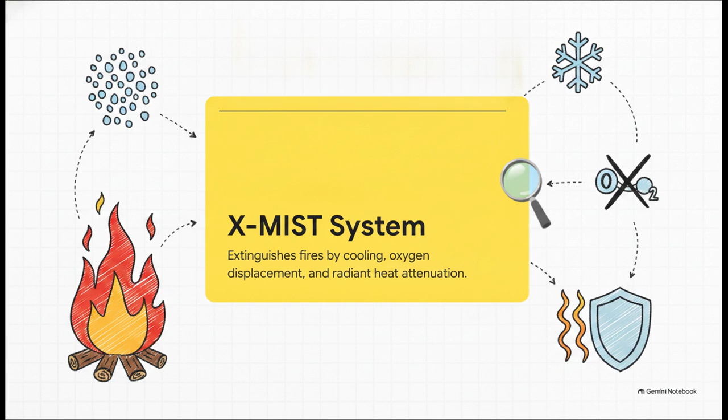So here's our roadmap for today. First, we'll meet the X-Mist system. 2, we'll go over specifications and main components. 3, automatic and manual operation. 4, installation and piping guidelines. And 5, inspection and testing procedures.

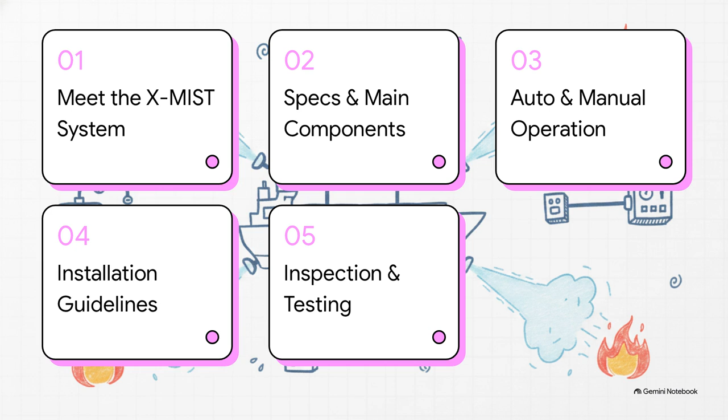All right, Section 1, meet the X-Mist system, certifications and core specs. Let's see what we're working with here. When we're talking about protecting engine rooms, reliability isn't just a corporate buzzword, right? It's a strict legal and operational mandate.

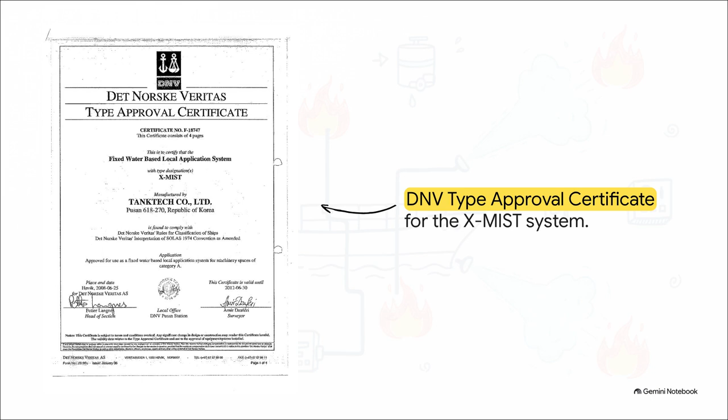This system holds a type approval certificate from Det Norske Veritas, officially approving the X-Mist as a fixed water-based local application system specifically for Category A machinery spaces. What that means for us is that this system has been rigorously tested to withstand the incredibly intense, high-vibration, high-heat environments typical of modern marine vessels, complying strictly with SOLAS regulations.

Moving right along to Section 2. Specifications and main components. The anatomy of X-Mist. Scaling this system for different risks is a precise science. Not every single part of the engine room requires the exact same level of suppression. For instance, the main engine setup is going to demand 13 high-level nozzles pushing 182 liters per minute through a 50 nominal diameter pipe. But compare that to the heavy fuel oil purifiers, which really only need 2 low-level nozzles running at 30 liters per minute.

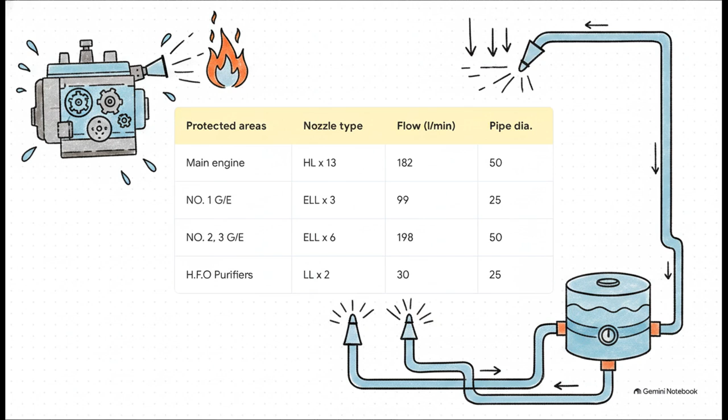The crucial takeaway here is that to supply all of these zones simultaneously with a 20-minute safety buffer built in, the whole system requires a maximum freshwater capacity of roughly 10 cubic meters. Now, pushing that much water at high pressure requires some serious hardware. The scope of supply for the X-Mist system includes a heavy-duty, multi-stage inline pump, and that's driven by a super robust 6.3 kilowatt, 440-volt motor.

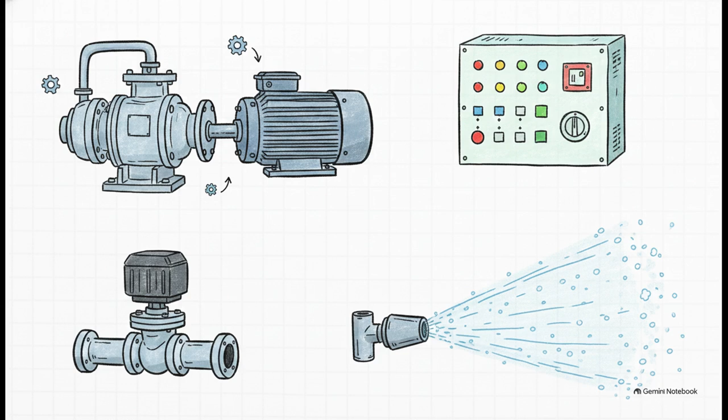It also features a comprehensive main control panel that serves as the absolute brain of the operation, motor operating valves to physically direct the flow, and of course, the highly specialized spray nozzles themselves. Zooming in on those nozzles for a second, these things are meticulously machined from SUS 316 stainless steel to completely prevent corrosion, and they are fitted with these LDPE protective caps at the top. Basically, they shield the delicate nozzle heads from ambient dust and stray paint during normal, everyday ship operations.

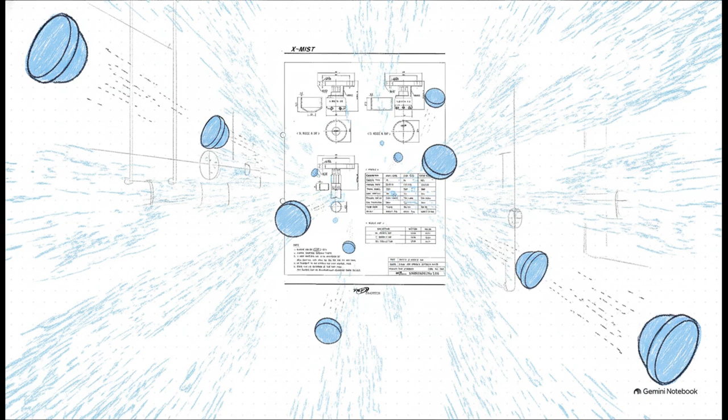But here is the genius part. You don't need to manually run around and remove them during an emergency. The exact moment high-pressure water hits the nozzle, those caps detach automatically, allowing the mist to deploy instantly.

Okay, Section 3, automatic and manual operation, system activation. Let's talk about the automatic sequence, essentially the system's built-in reflexes. A fire must actually be picked up by 2 completely separate detectors to fully activate the system. If just one detector trips, you get a pre-warning alarm. But if that second detector actuates, the system takes over entirely. It sends out a major alarm, commands the main control panel to start up the pump, and automatically opens the specific section valve for that particular zone.

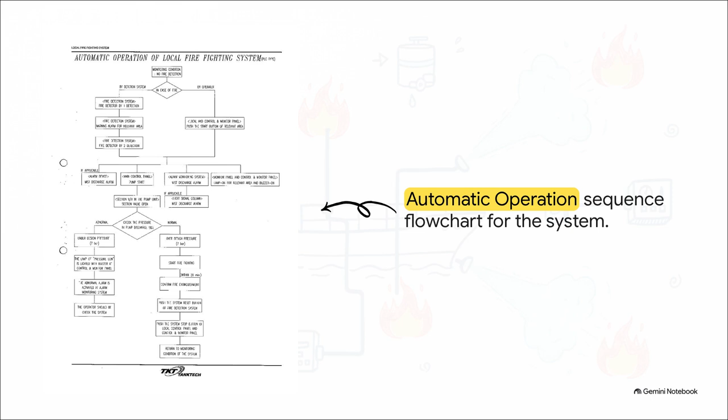Once activated, a highly vital pressure check occurs right on the pump's discharge side. If it's under the design pressure of 7 bar, an abnormal alarm triggers so the operator can jump in and troubleshoot. But if it's over 7 bar, boom, it immediately begins firefighting.

Alternatively, an operator totally does not have to wait for the automatic system to kick in. If a crew member actually spots a fire first, they can manually initiate the whole sequence from a local control panel right near the protected area, or directly from the main control panel in the engine control room. Once that manual start button is pushed, the logic basically mirrors the automatic sequence.

Alarms sound, the pump starts, the section valve opens, and that exact same critical 7-bar pressure check happens before the mist is discharged. It essentially puts total control into the hands of the crew.

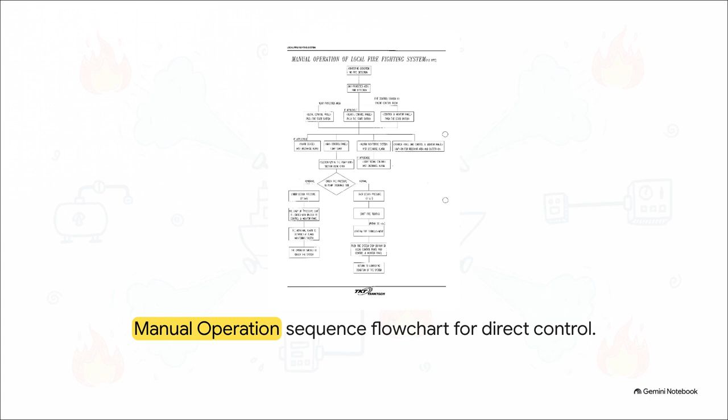Now, the thing bridging the gap between those electronic panels and the physical pipes is the motor operation valve, or MOV. Using the main control panel or the local push-button switch, the operator can electronically command the MOV to open or close the exact valves needed.

This provides extreme accuracy and response performance, meaning absolutely no one has to run down into a blinding, smoke-filled room to manually crank a heavy physical valve open. It's a real game changer for safety.

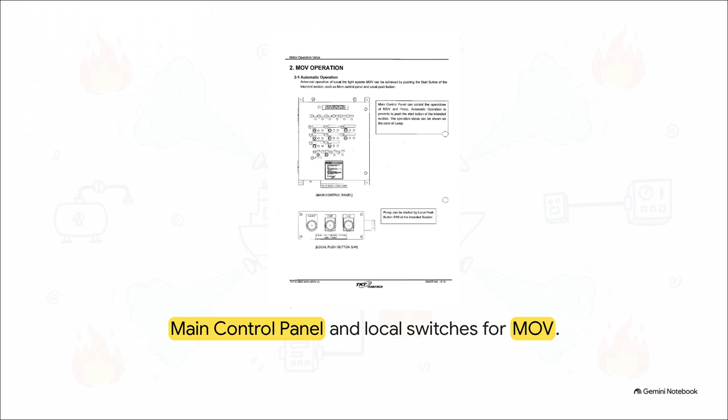All right, Section 4, Installation and Piping Guidelines, setting it up right. Water flowing at high pressure creates immense kinetic energy. Because of this, all nozzles must be installed pointing strictly downward. Moreover, the piping must be strongly supported with specialized heavy-duty brackets. The distance between the support bracket and the nozzle actually has to be kept as short as humanly possible.

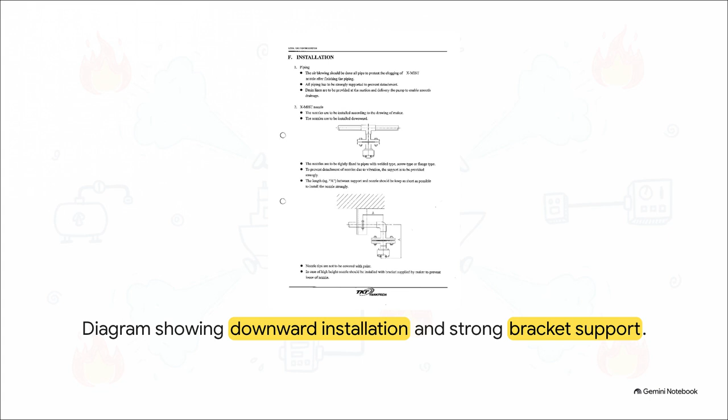Why? To completely prevent the nozzle from violently detaching or vibrating loose when the 7 to 16 bar pressurized water suddenly slams into the line. The piping network also has some really strict operational rules we need to follow. Right after installation, every single pipe must be blown with compressed air to clear out debris, because honestly, a clogged nozzle is completely useless in a fire.

Drain lines are also absolutely mandatory to ensure water doesn't sit and stagnate in the delivery lines over time. On the pump side, a strainer must be installed on the suction line, and the piping has to be physically fixed in a specific way that totally prevents an airlock.

And perhaps the most critical rule for the mechanical longevity of the unit, you must completely fill the pump with liquid before starting it. Never, ever run the pump dry. Seriously, don't do it. Which brings us to our final section.

Section 5, Inspection and Testing Procedures, Readiness and Troubleshooting. A fire system is ultimately only as reliable as its last inspection, right? The manual outlines a totally clear, non-negotiable maintenance schedule. Daily checks ensure the control panel is clear and completely free of abnormal indications.

Monthly, you're literally listening for abnormal noises on the water pump and verifying the pressure, alongside testing the wire connections and lamps. And annually, that's a complete overhaul of the pump unit, the motor, section valves, and filters, plus meticulously checking all nozzles for clogging. Skipping even one of these intervals totally compromises the entire system.

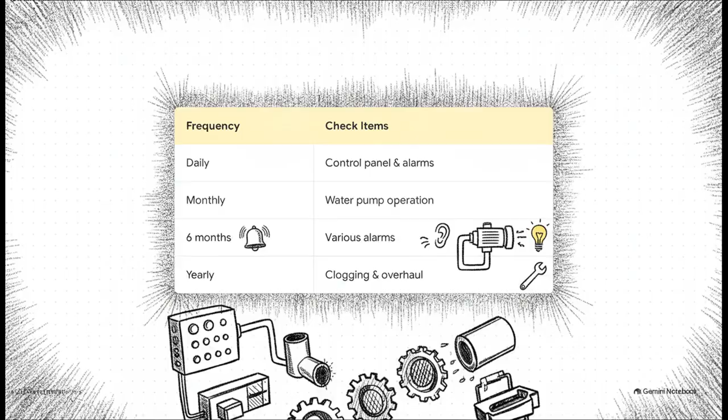So you might be wondering, how do you actually test a system that pumps 5 cubic meters of water without accidentally flooding your own engine room? Well, you follow this exact 6-step operation test procedure. First, ensure all section valves are strictly in the closed position and the main water supply valve is open. Then, you open the pump drain ball valve.

From the main control panel, you turn the select switch to manual and push start. At that point, you can safely check the pump's running condition and verify the pressure on the gauge while the test water just drains out harmlessly. Finally, push stop and drain out any remaining water from the pump unit. It's simple, but absolutely critical.

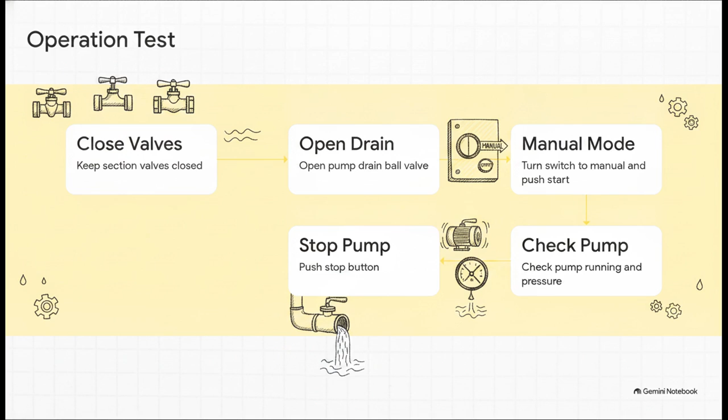Now to test the automatic logic. Again, without flooding the space, you perform an automatic release test. This time, you completely close the water supply globe valve and physically disconnect the motor power cable. You open the air ball valve, allowing compressed air into the system. Then, you simulate a fire by actually actuating 2 detectors in the relevant area.

You verify that the main control panel and monitor panels alarm correctly, and you visually check that air is releasing from the appropriate nozzles. This confirms the path is perfectly clear and the section valves opened automatically, just like they're supposed to.

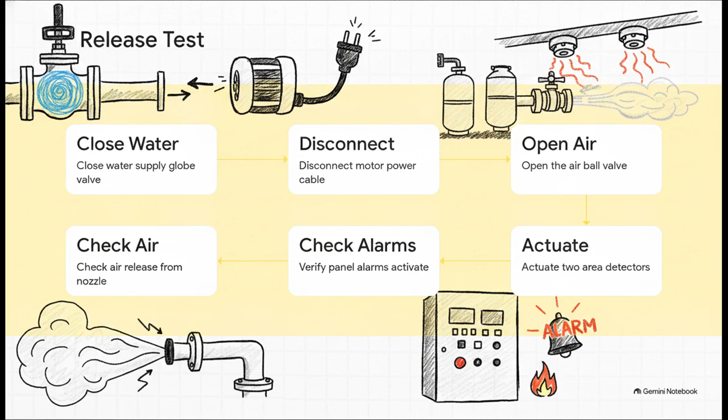But wait, after any test or real-world use, you can't just turn the system off and walk away. As a critical troubleshooting and reset step, you must drain out all remaining water and blow the entire piping system through with compressed air at a pressure of 7 to 8 bar. This guarantees free passage of air from the nozzles, ensuring that literally zero moisture or debris is left behind to cause corrosion or clogs before the next emergency.

And that brings us to the end of our explainer. Understanding the X-Mist's anatomy, flowcharts, and testing protocols begs the ultimate question, doesn't it? Is your vessel truly prepared? Do you have the discipline to follow the monthly and yearly schedules?

And is your crew genuinely trained to execute both automatic testing and manual operation flawlessly in the heat of the moment? The engineering here is incredibly sound, for sure, but its success relies entirely on your readiness.